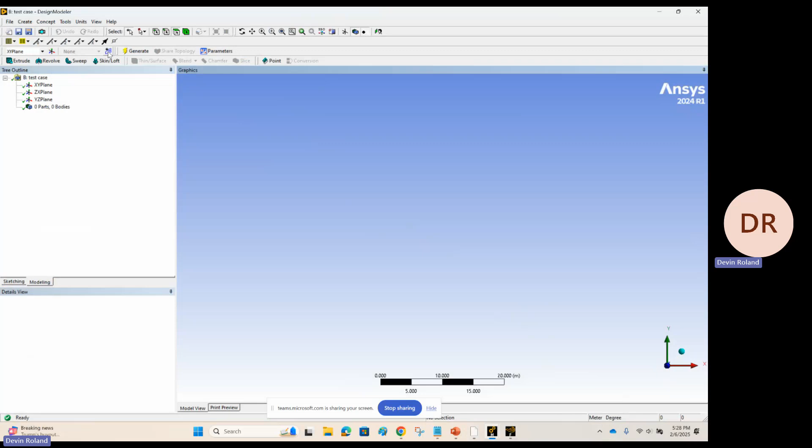To create a sketch, you can click the new sketch button here, but what I do is just click on the plane, and it auto-creates that first sketch. If you ever want to create a new sketch, there's a button up here to do that.

So then what we're going to do is use the geometry options here. I want to make a rectangle. Let me do this - if you click tools in the upper left...

I'm sorry, units - make sure you have meters selected right here. If you ever need to change your units, you can do that in the upper left, and make sure you have meters there. Then come down and click rectangle, and go ahead and make a rectangle, kind of like that.

While you're doing that, I'll give some background. What we're doing is having a two-dimensional cylinder, just a circle in this case, and running some cross flow over it. This box is an air box - when doing Ansys simulations, you have to create a fluid domain, and whatever shape you're testing is like a negative inside that domain. So this box is like a box full of air, and the cylinder is like a circular cutout from that fluid domain. You could imagine making that into an airfoil or the glider you're doing, with that glider cut out instead.

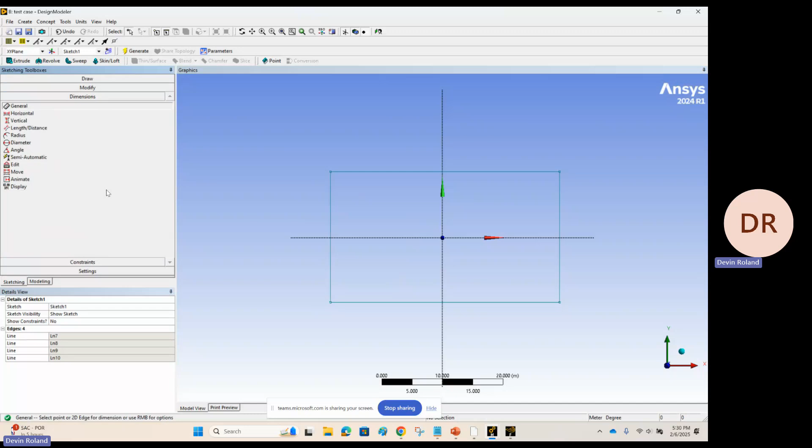So if you have that rectangle, go ahead and click dimensions in the option tree over here, leave it on general. Then click the corner of the box, come down and select the axis, and leave a vertical dimension.

You can do the same thing for the other half of that box. Then click the side length at the bottom to set the horizontal distance of the box. And then I'm going to have a dimension here so I can position this the way I want.

As you make those dimensions, you modify them in the tree on the left - they'll all show up right here, and you can just click that and set the dimensions right there.

So let's do maybe 30 meters - yeah, let's do 30 meters wide. Then set that to 15 there to make it even around the y-axis. And for the other two, set those to 7.5 meters.

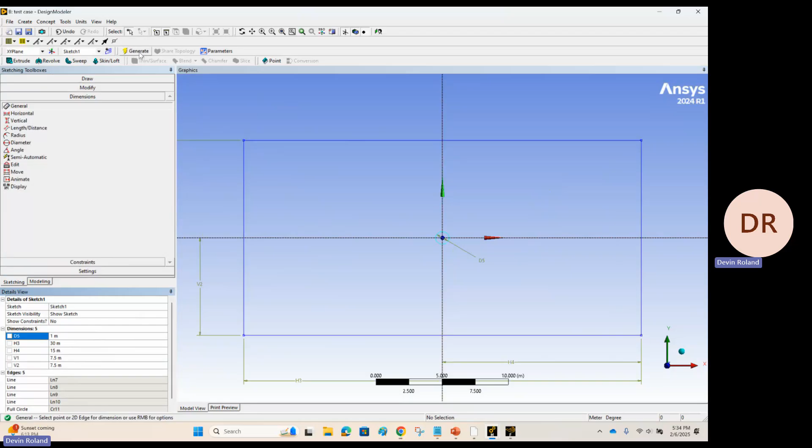Then click - if you notice it's light blue - click generate, and it turns dark blue. So now it's added to this sketch.

From here, what we're going to do is take this sketch and turn it into a continuous surface. This is necessary to make this into something we can actually use - I guess you could say you're turning it into a part. So you're turning the sketch not into an extrusion, but actually making it into a part per se.

So you come here to concept and click on surfaces from sketches. This is kind of a quirky thing with Ansys - you're going to open up that XY plane in the tree and select sketch 1, so it's highlighted in the tree and in your window. Then you have to click apply under base objects here. By selecting sketch 1 and clicking apply, it's now ported sketch 1 into this tool menu down here. Everything else there, just leave default.

Then click generate. You'll notice right now it's still just a sketch - this tool is not active until I click generate. Then it turns gray, and that's how you know it worked.

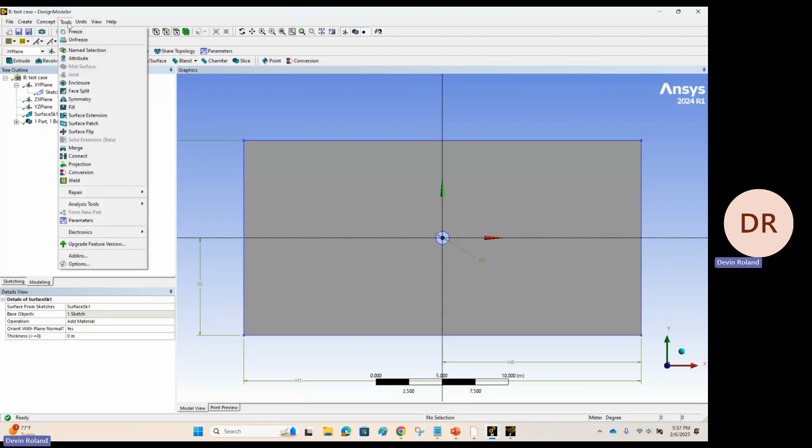If you're doing something like an airfoil, you'd kind of do it like this. But if you ran into a scenario where the geometry is more complex, you could build multiple sketches and multiple surfaces, and then use Boolean to cut them apart from each other. Okay, cool, interesting, thank you. I think Boolean is right.

Create, and then there it is. So if you had two bodies, you could use Boolean under the create menu. I guess it's grayed out right now because we only have one, but yeah.

Okay, so give it a save, if you haven't saved it, do that. And so now we're pretty much done with this. We're almost done. If you notice down here, this is that surface we just created, that's where that comes from. You can expand it, you can see it's based on sketch 1.

And we also have this one part, one body menu here. So this is what I said, it's like a part we've made, or a body, you might say. And it has this surface body underneath. Click surface body, and down in the tool menu you can see the number of faces, number of edges, number of vertices, your surface area, your thickness, and all that's good just for your own knowledge, statistics and whatnot.

But if you go down here to fluid solid, go ahead and change that to fluid, and that's going to tell Ansys that this is a fluid domain, so that it can propagate that into the next set of tools. And go give that a save for me.

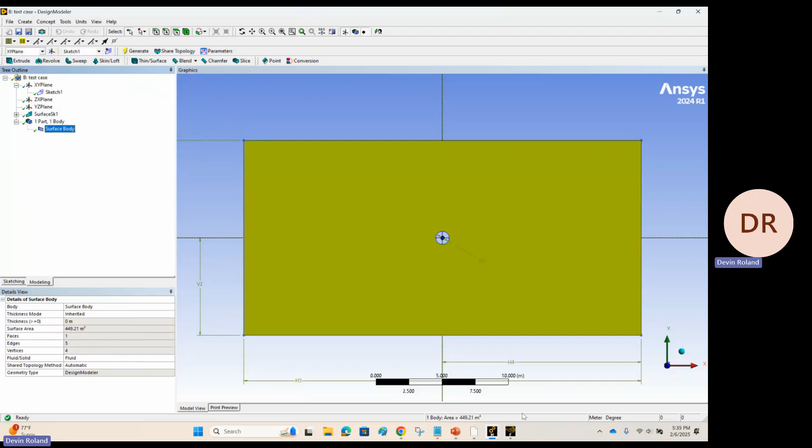Tell me if you need me to come back here, and I will. But what you're going to do next, close out of that quick. There we go.

Okay, let me get out of that real quick. All right, so if we come back to Workbench, we're going to do a lot of this, working in one software, come back to Workbench to control everything and kind of hopping back and forth.

Left click on mesh over here in the little toolbar. You can see that it says the physics is CFD, that's good, all good. Solver is Fluent, that should all be default as far as I'm aware, so we're not going to change anything in this menu. You're just going to right click on mesh and click edit, and this will open up the meshing software.

Yeah. Oh, it's gone? Yeah, okay. This software will...

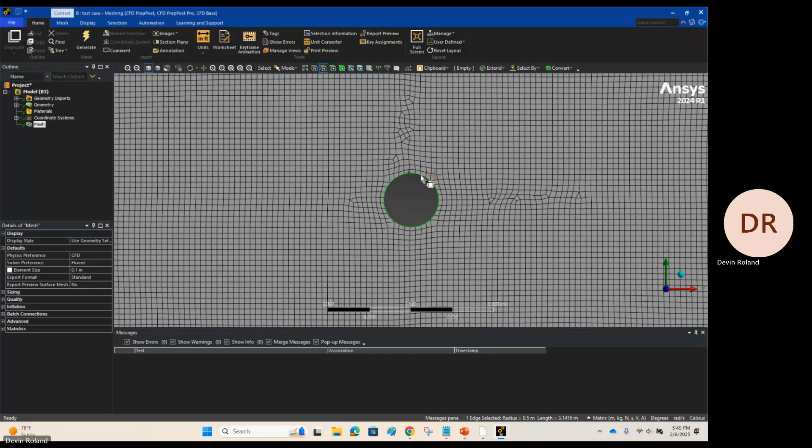And then right click, click insert or highlight insert, and then click sizing. You can also get there by right clicking on mesh, insert sizing, and then select the circle. If you do it that way, you'll just have to come over here and click apply, like we did in the geometry menu.

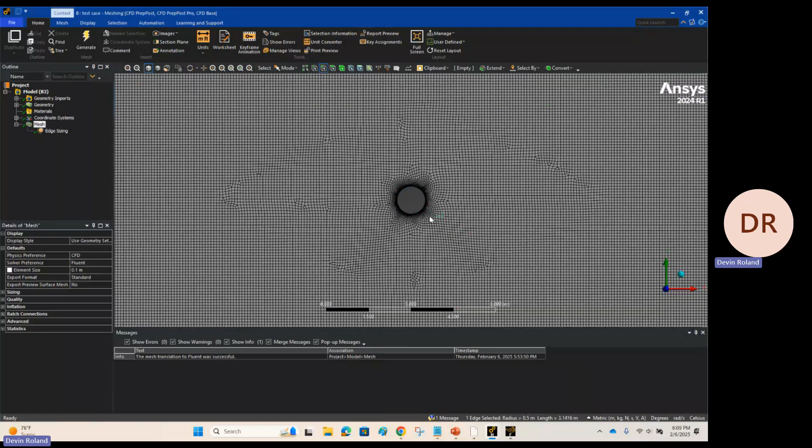Okay, so if you're back in meshing, what we're going to do is name all of these surfaces. That way in Fluent, it'll know - we'll have labels for each of these boundaries we want to modify. So having that edge selector selected, go ahead and select the surface of the circle of the cylinder. It won't always highlight, but at the bottom you can see it says one edge selected. For some reason it won't always highlight the edges, or it might highlight some and not others. So that's good, you can confirm you selected it.

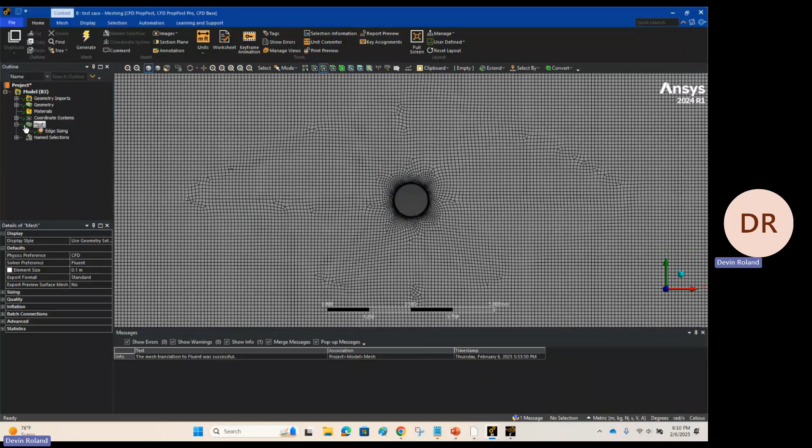Right click, do create name selection, and then name it something like just cylinder maybe. Hit enter, and on the left hand side under mesh, you'll see that edge selected, or you'll see it's popped up - no, right here, under name selections you'll see cylinder pop up there. Yeah, so there's that.

So go ahead and click the left-hand face, do create name selection, name that one inlet - that's where airflow will come in from. Click the right-hand side, create name selection, do outlet - that's where our flow will leave from.

And then click the bottom, hold control, and click the top, hold control, click the bottom, and now you'll see it says two edges selected down there. Create name selection and name that walls. Okay, so now you'll see in the left we have cylinder, inlet, outlet, walls.

And then, yeah, once you have that, go back to Workbench, right click on Mesh, and click Update again. And so now it'll have ported those names into Fluent for us, or it should have at least. Let's see. There we go. So if it doesn't show up right away, go up there to File and click Refresh Input Data - it'll reload, I guess, from the meshing solver into Fluent.